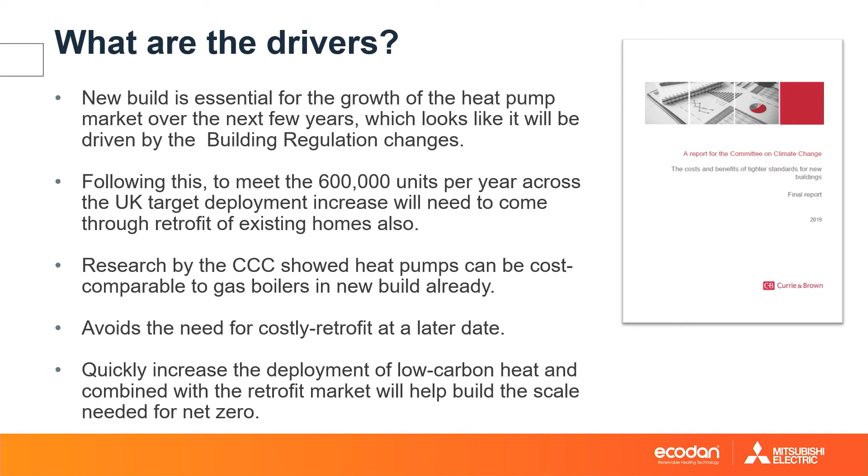In new build, for example, there's no need to put a gas network in. That means the cost to install heat pumps is very comparable to gas boilers already. Maybe slightly different in retrofit where there's more work to be done. But the new build growth plus the retrofit market will build the economies of scale that we really need to move forward to the next step.

The CCC projects a huge uplift in both new build and existing homes moving to heat pumps. This is both in off-gas grid areas, which, to be honest, up until now has been the main focus for retrofit—there's been a number of large projects moving people out of fuel poverty, replacing storage heaters, solid fuel and oil—and it's going to be increasingly moving into on-gas grid areas, which has been a difficult market in terms of new technology to enter into.

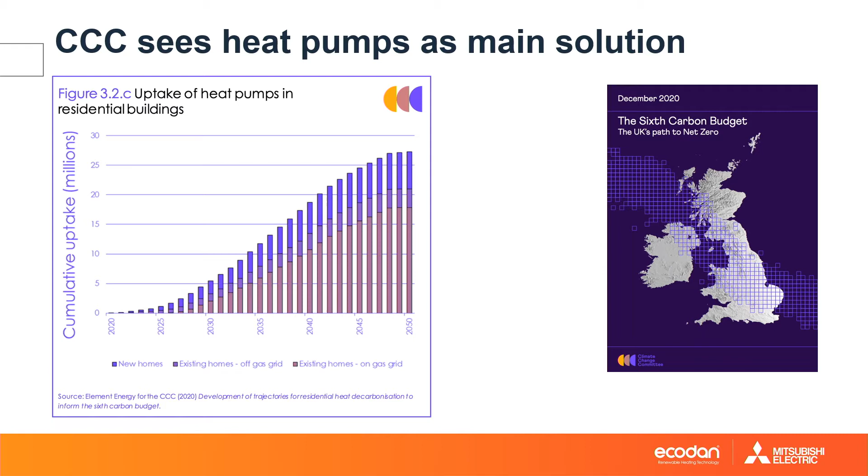In the past, certainly on paper and because of the electrical network, it still wasn't possible for heat pumps to contribute to net zero carbon. But as the grid is getting much cleaner, particularly with wind and solar, and particularly in Scotland, it has to be said, we're ahead of the game.

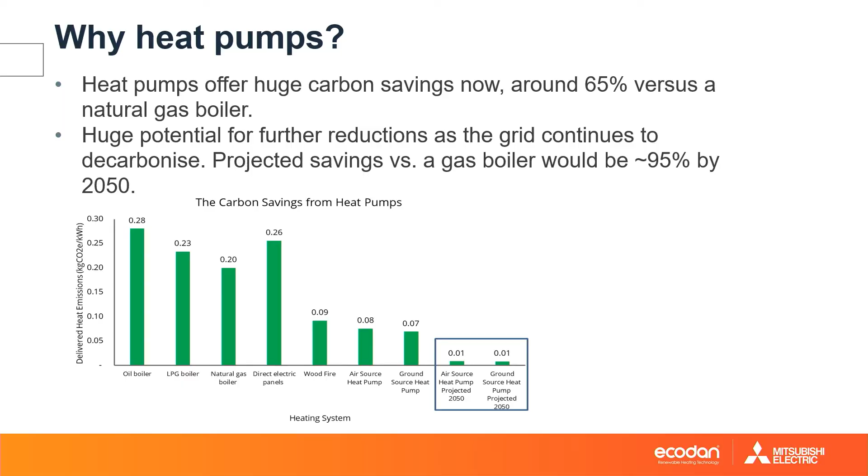We've cleaned up the grid, and this is going to bring emissions down to what you see on the right-hand side of this graph, which is by 2050. In terms of using heat pumps and the cleaner grid, this will provide even lower carbon emissions and be a step towards net zero.

In terms of sales in the UK, Neil mentioned earlier about the number of installs in Scotland. Two years ago, sales of heat pumps were only about 35,000 units in the UK, and that's still relatively small if you compare it to gas boilers. But certainly, in order to decarbonise the heat supply, we're going to have to rapidly increase that.

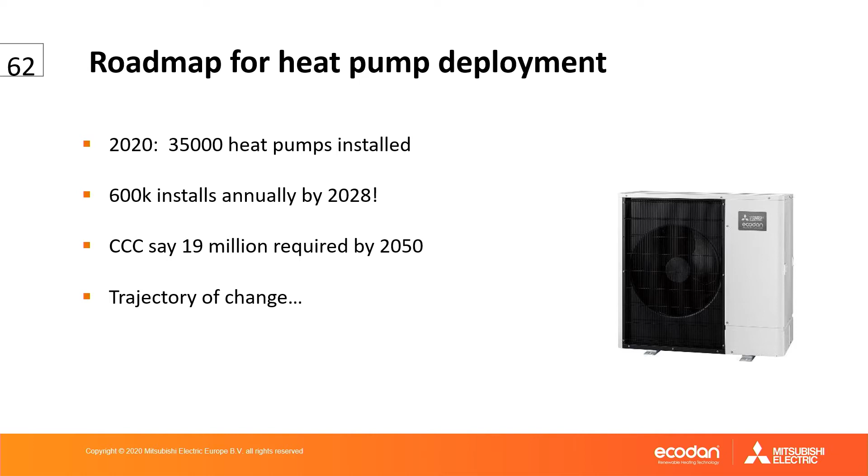The projection is the requirement will need to be about 1 million annual installs by the mid-2030s, which is quite some change. At this rate, the deployment of around 19 million heat pumps recommended by the CCC to attain net zero by 2050 could be reached if we move forward with that programme. Again, in Scotland, we are at the forefront of that growth.

Big part of that is government policy, there's no doubt about that. There's a projection of 600,000 heat pumps per year installed, and the aim to eliminate fossil fuels in new builds by 2024 in Scotland, and in 2025 in the rest of the UK.

So as I say, I think we are pushing it forward in Scotland, which is good to be involved in. As we're all aware, the Heat in Buildings Strategy has been published, and it includes government investment of over £1.8 billion over the course of the Scottish Parliament.

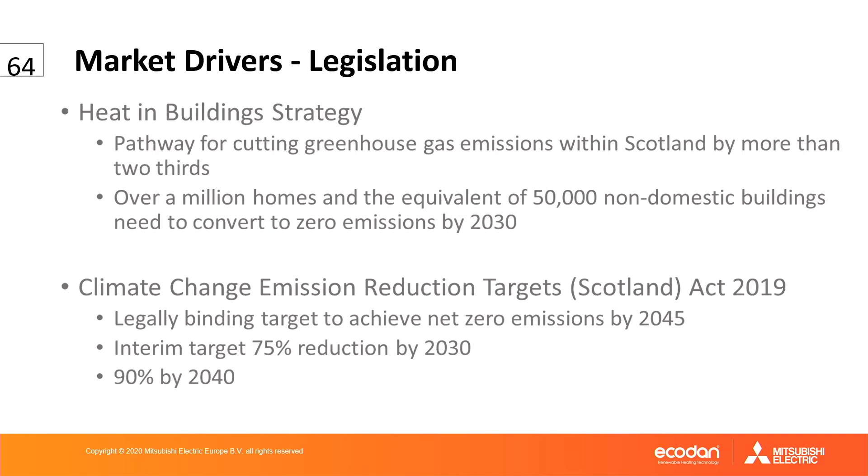This strategy should certainly help drive the transition and change required, aided by impending changes to the Scottish building regs. In terms of what we can expect for new build, and we're looking here at both retrofit and new build, currently in Scotland domestic heating and hot water falls into Section 6 and 7 of the Scottish Building Standards.

It's moving now to the new build heat standard by 2024. As I understand it, there will be an uplift in October to the improved standard, which is essentially a 32% emissions reduction. That's an interim uplift before the move in 2024.

Looking at building regs compliance and SAP, to me it's always been a bit of a black art, and I think it still is. Scotland will be moving to SAP 10 again within the next few months, as will England and Wales with their move towards the Future Homes Standard. So slightly different for us.

So how are we doing so far? In Scotland at the moment, only about 4,000 households install low and net zero carbon heating each year, so it's relatively low. But having been in this sector for 8 years, it is dramatically increasing, and you can see the move, which has happened over the last 18 months or so, particularly in new build where the regs are beginning to change.

On the retrofit side, it still continues to grow, although I think at the moment there's a little bit of a gap in terms of the funding. With RHI no longer available, albeit there's a lot of good stuff going on with Home Energy Scotland and the Energy Saving Trust, offering cashback and so on.

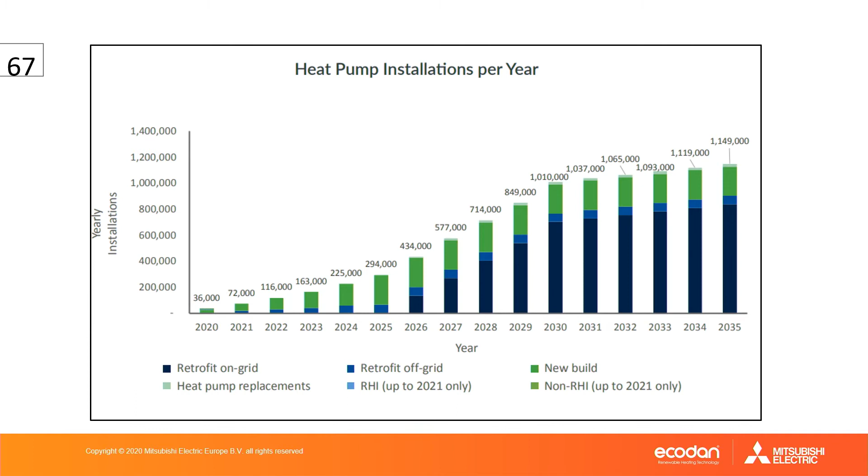Overall, I think the expected step change can clearly be seen in this overview. There's a number of graphs been presented, but again, it shows the rapid growth in new build and retrofit, both on gas and off-gas areas as well, over the next 10 years. Now that's a projected growth.

In terms of heat pumps, what are likely to be the main options and what do they look like? I'm just going to focus on a couple of them. Ground source and air source heat pumps are two of the key options. There's also the option for hybrid heat pumps, exhaust air and others, and certainly they all play a part.

And one size doesn't fit all. After 8 years, it's clear there's not one solution to everything, but there is a solution, and heat pumps are going to play a major part in that.

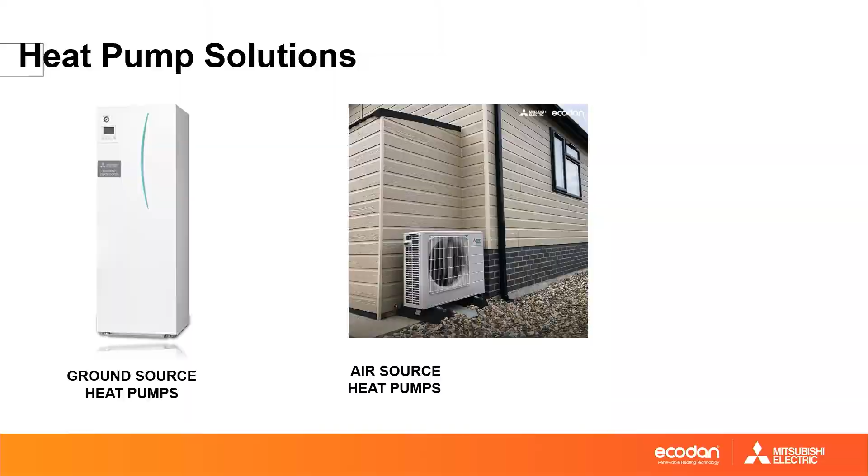One of the questions I'm still asked after 8 years is, isn't it too cold in Scotland for a heat pump? I won't get into too much detail, but it isn't - it's not actually that cold in most parts of Scotland, and heat pumps are effective. We've got a lot of projects over Scotland that show that.

So in reality, when can you use a heat pump? They can be installed in many or most properties in Scotland. Obviously it's a fabric-first approach - get them upgraded, get acceptable insulation, get the construction and the envelope as tight as we possibly can, good standard of glazing, reasonable air tightness, and space for the heat pump, usually at the back of the property.

And that's usually one of the big issues - where do we put the outdoor unit? But again, heat pumps have got a lot quieter and smaller, so they're usually an option. Also, space for a hot water cylinder if the heat pump's going to do hot water, which does make sense most of the time, so space for that in the properties.

But this is certainly a typical local authority house - I was brought up in one very similar. This is in Lanarkshire, in Forth, a small village in Lanarkshire, where South Lanarkshire Council installed a large number of heat pumps in off-gas areas.

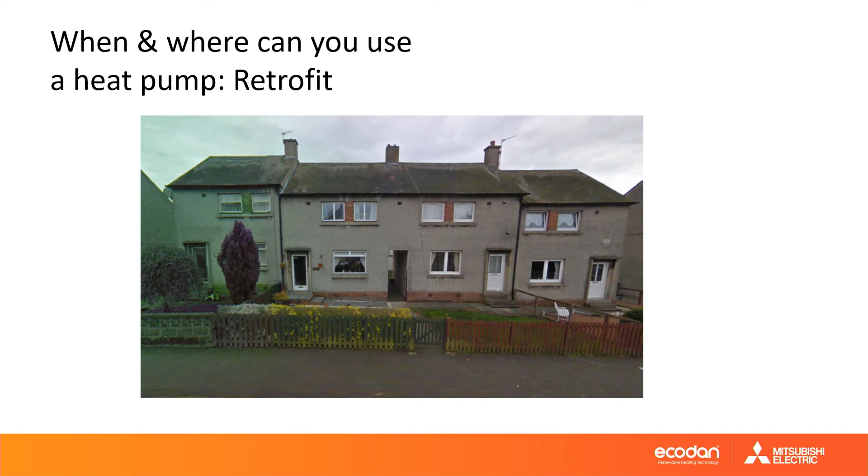And the driver for that was fuel poverty. I came across elderly people paying £60 a week for storage heaters.

So the question usually is, will I save money? It's not the main driver. We can't always say they will save money, but certainly what they will get is whole house heating, comfortable background heating, and heating that they can actually control - as close as you're going to get to a gas boiler in many situations. And we'll certainly see many installs around Scotland.

Typical setup is here - I'm not going to go through it in too much detail, I'm sure some of you will have seen it. But this is a typical monoblock where all the refrigerant is in this outdoor box, and essentially that's your new boiler.

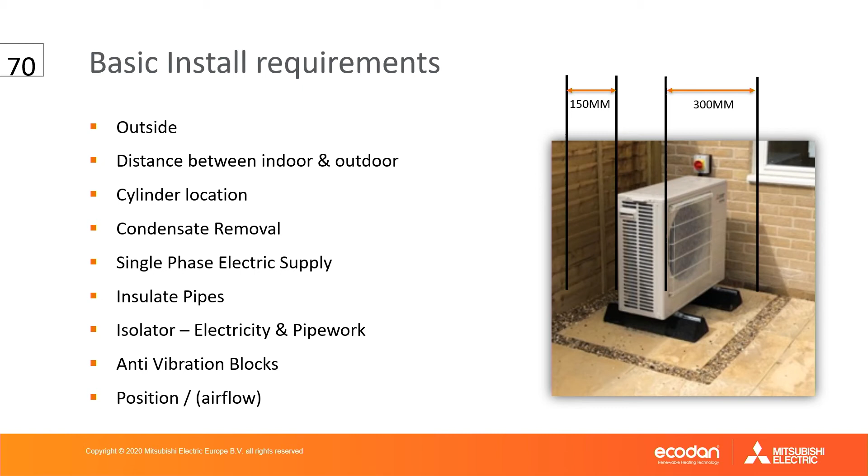Try and demystify it - people aren't that interested in what type of boiler they have, as long as it works and as long as they can pay for it. But in terms of demystifying heat pumps, it's a case of, that is now your boiler if you like. All it has is a flow and return water connection and an electrical connection. I'm not a heating engineer, and even I could install one at a push - and my colleague Craig will be laughing at that one when he's sitting up there.

In new build it's even easier because obviously you're starting from scratch with very thermally efficient buildings. And interesting, the lady mentioned passive house earlier on - about 7 or 8 years ago I spoke to an architect who said, Ian, there'll be a lot of passive houses, you'll only need a plasma TV to heat up the room. At the time I didn't really fully understand that, but I know where they're coming from now.

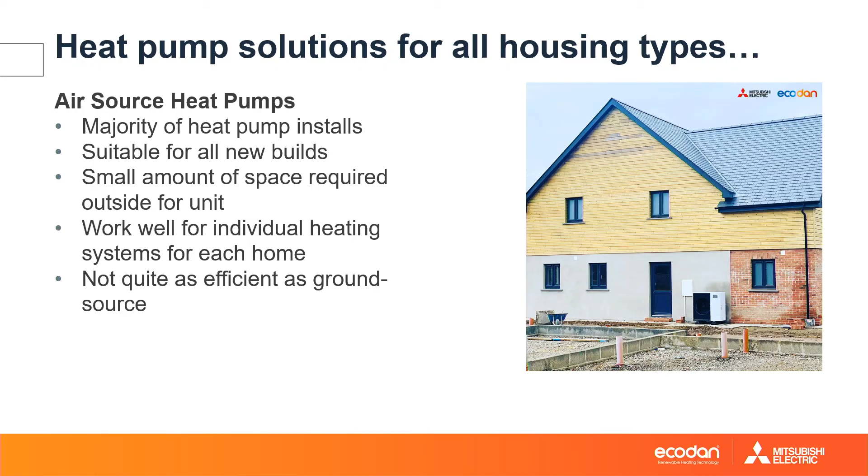And certainly heat pump technology will have to move to match that, because in terms of heat demand, it's going to get lower, though hot water demand is still going to be quite high. But new build actually makes sense.

It makes sense already. In terms of the growth in private new house builders, I can see the demand - 2 or 3 years ago the new house builders were interested in the technology but weren't really ready to even have a chat about it. But a number of these house builders have introduced heat pumps, sometimes hybrid, and they're moving it along very quickly. They can see the advantage of actually promoting renewable heating in the properties is a big plus, and they can see that the consumer, the general public, is aware that they need to change.

And certainly in social housing, we've got a lot of new builds and a lot of retrofit as well. Here's just some examples from the Hebrides through to the Highlands - there's award-winning projects here, and throughout Scotland into the Central Belt now. Many social housing new builds are working, have heat pumps working successfully, and there's a lot on the table that are moving forward with heat pumps.

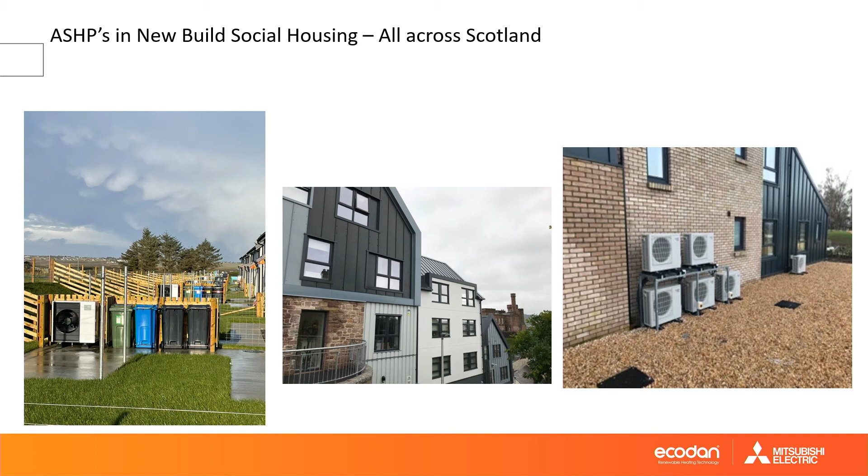So it's interesting to see the growth. There will also be an increasing amount of heat networks - Neil mentioned this earlier - which will encourage the use of ground source heat pumps, where externally you can use boreholes, or we can build in district heating and heat networks and use shared grounds in large private and social new build developments. So that will come.

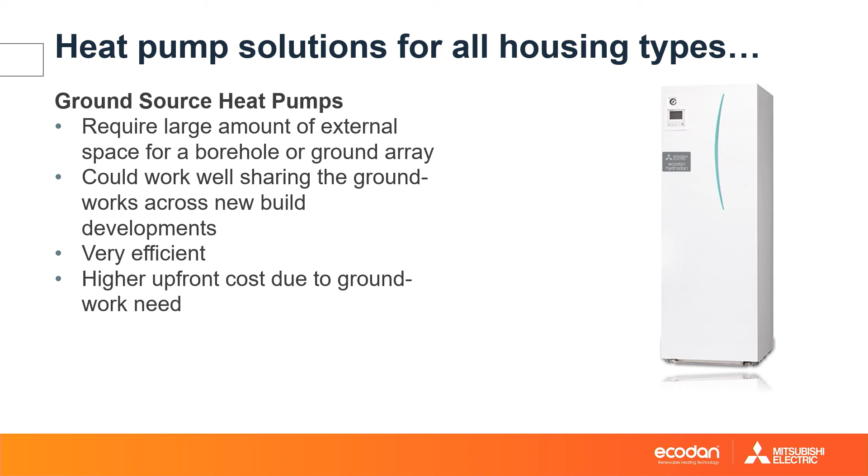District heating, communal heating has been more difficult to move along because it's just a bit more technical, there's more to it. But again, we've got heat pumps using the Clyde as an energy source, which replicates what's been going on in London, where they're using the Thames, and elsewhere where heat pumps have been more advanced than what we have here. But you can see it moving along, and it's really interesting stuff that's going on.

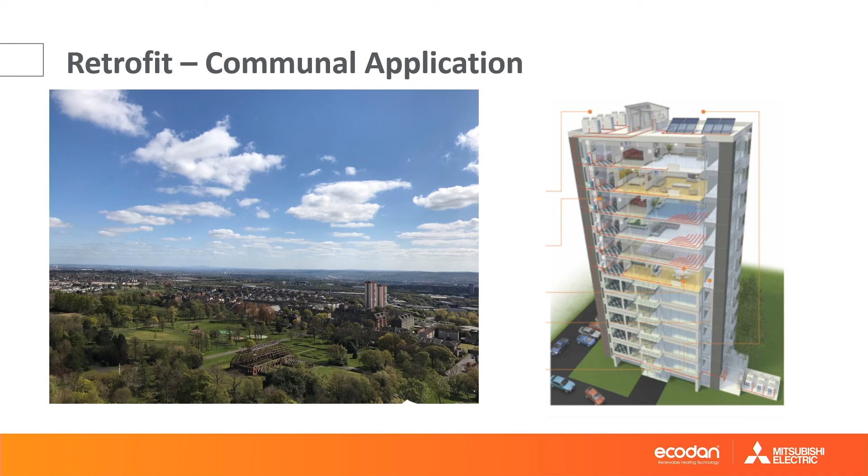There's also other innovative projects that have been used and are moving along now. For example, in Glasgow, there's a very innovative use of heat pumps in Springburn, North Glasgow, where several multi-storey tower blocks have undergone massive improvements. It's not just been to the heating, it's a really impressive project. If you get the chance, go and see that.

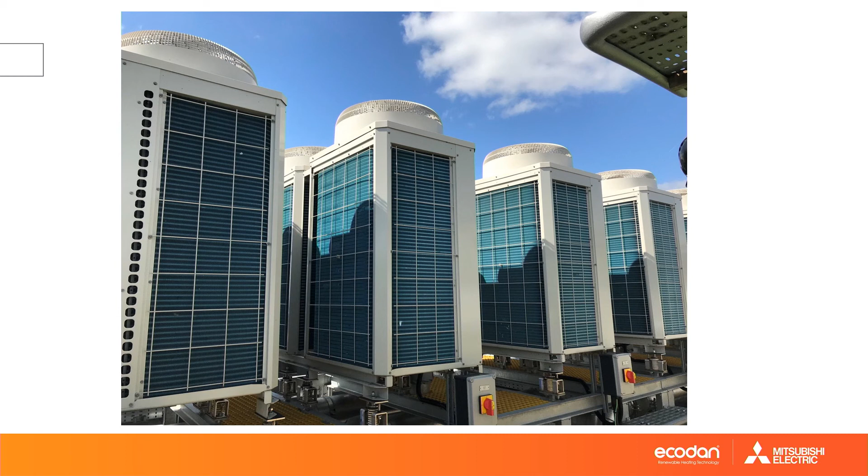You've got multiple air source heat pumps on the roof and on the ground in some of the buildings, and they provide whole house heating for hundreds of residents, and in many cases have cut heating costs by half. A lot of the time they'll actually use the heating now, which they haven't done in the past. I think it's a tremendous achievement and a lot of commitment by the Housing Association and all concerned with that project.

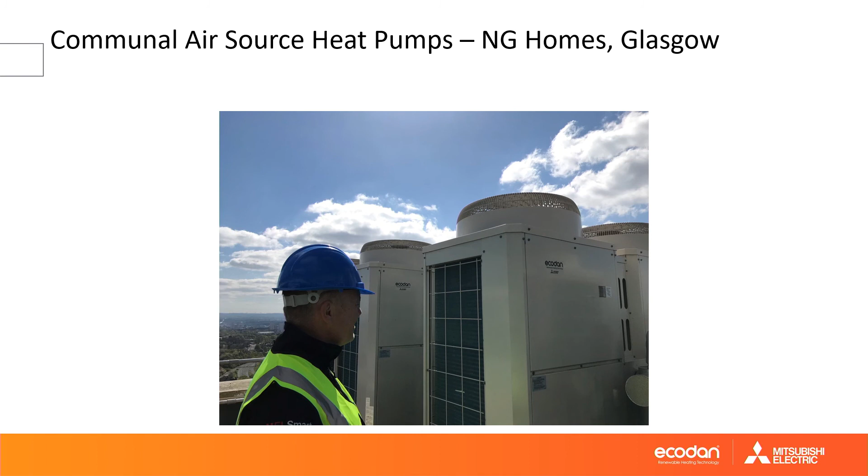I think it's important to look at opportunities this new low-carbon revolution can offer to Scotland. The Minister and my colleagues here on the stage have spoken about opportunities for Scottish businesses in manufacturing and skilled employment in Scotland. Myself, I was an apprentice engineer, served an apprenticeship and was made redundant in the early 80s, and couldn't get back in during the deindustrialisation of Scotland at the time. And you have to move on.

But I think there is a massive opportunity for training and getting youngsters and young people involved in renewable heating, so hopefully we can do that, and there can be a new revolution in renewable energies. At Mitsubishi, we have a UK head office, but we've also got manufacturing facilities in Scotland, and we've developed those facilities over the years to ensure we're ready for the mass market growth in heat pumps. We employ 1,600 people at Livingston. There's a massive opportunity to train installers and engineers across the country to enable this mass adoption of low-carbon technologies over the next 10, 20, 30 years, hopefully.

Finally, I think to ensure that the public and consumers find it easy to transition to new technologies, because some of the technology is new, it's important that house builders, landlords and manufacturers provide the support and backup to explain how the technology works and make it easy to use. For example, the best thing is the simplest controls that you can, make it easy for people to follow. It doesn't need to be difficult.

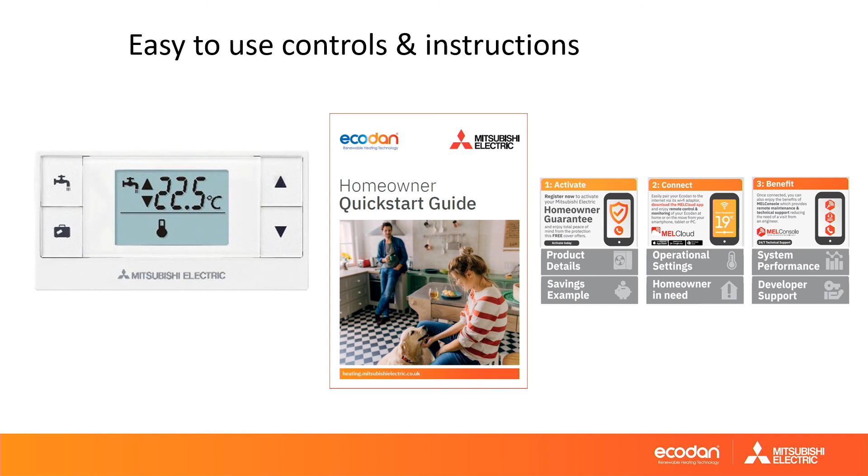Clear instructions - and now more people want to be able to control their home systems through Wi-Fi, which you can do. And if you've got a problem, you can call up the manufacturer and they can diagnose the problems and hopefully sort them without sending an engineer out. So I think this user-friendly technology and increasing public awareness will allow us to adopt that.

And again, there's going to be more, other companies in the market are doing this. They're getting closer to the customer, they're doing marketing. Heat pumps have been on the TV, which is quite amazing compared to 8 years ago. So that will build up and hopefully enable acceptance of low-carbon technologies and make it easier to move toward these net zero carbon targets. I hope that's been reasonably interesting, and thanks for listening.